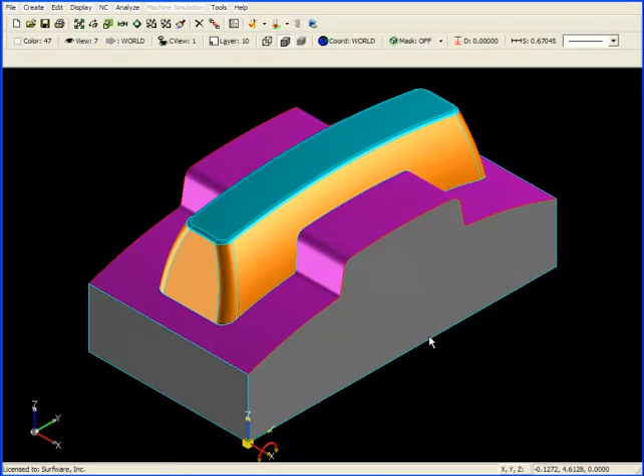In this video, I'd like to talk about pencil cut. A pencil cut is the ability to drive a tool along the intersection of two surfaces. To get to pencil cut, we're going to go to NC, down to 3-axis, and move down to pencil cut. SURFCAM asks us to select the cut surfaces, and I'm going to choose visible.

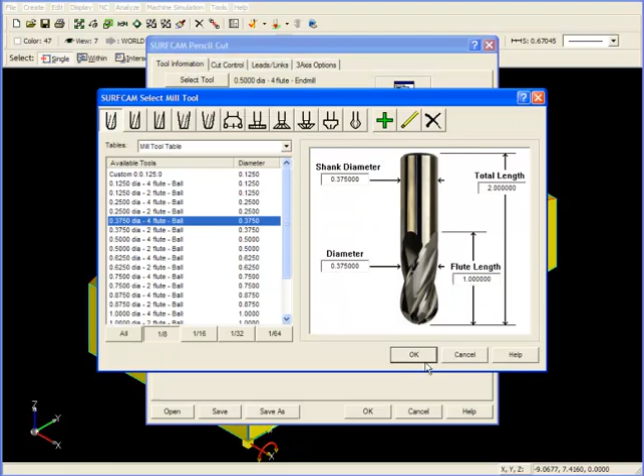I'm going to select a ball nose end mill, so I'll click on the ball nose icon and choose a .375 4-flute ball. Click OK, and we're asked for tool number, length offset, and diameter offset. Make sure these numbers are appropriate for your program. I'm going to go to cut control, and we're going to look first at step over. Step over is the distance between passes. I'm going to give it 20 thousandths.

You see here we have an XY stock to leave and a Z stock to leave. You can leave this at 0 if you want to cut to finish size, or add or remove stock by putting in positive or negative numbers. We can also put in extra stock to leave, which essentially increases the diameter of the tool that you're using. This makes it possible to use a smaller tool on a larger radius. Our angle ranges from 0 degrees to 90 degrees. I'm going to accept that for now.

The other thing we want to look at is down here at the bottom where it says limit offset passes. We're going to have 5 passes on either side of a centerline pass. All these passes work from the outside in, which means that you're going to remove material in the most efficient manner. I'm going to click OK, and we're going to see what we get.

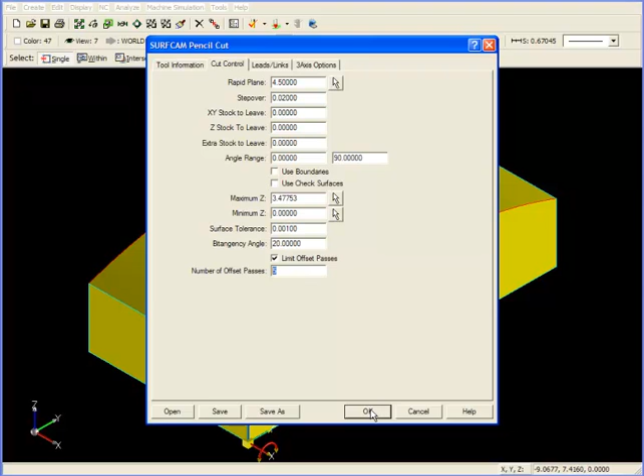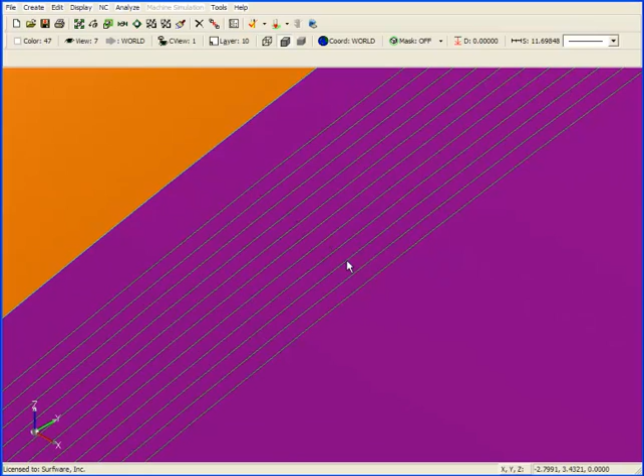Here's what our pencil cut looks like when completed. If you recall, we asked for 5 offset passes. And if we zoom in, we can count those 5 passes on either side of the center line. Here we have 1, 2, 3, 4, 5. Here's our center line pass. And then 1, 2, 3, 4, 5 on the other side.

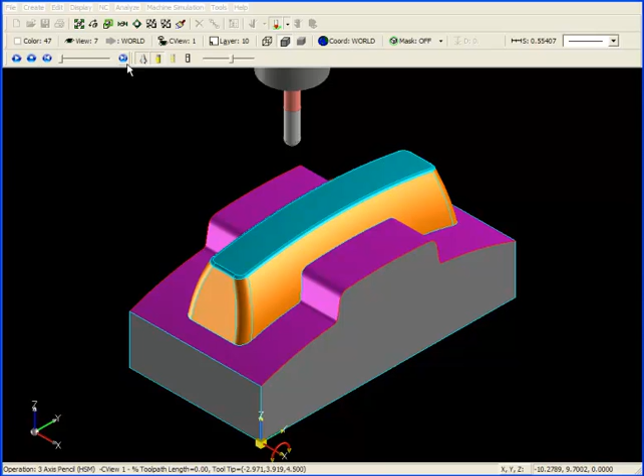Another thing to look at here is the high-speed machining moves as we enter and exit the material. This will provide you with a smoother blend into the part and speed up your machining process. If we want to see how the pencil cut works in real life, we can go up to Backplot, select our pencil cut, click OK. Then I'm going to adjust our slider bar here to increase the speed of the simulation, add a tool holder, and press play.

Here the pencil cut is coming in from the outside, going around the majority of the part. Now we're cutting one of the sides and the other side. You see all of these passes occur from one side of the center line or the other, all with high-speed moves.

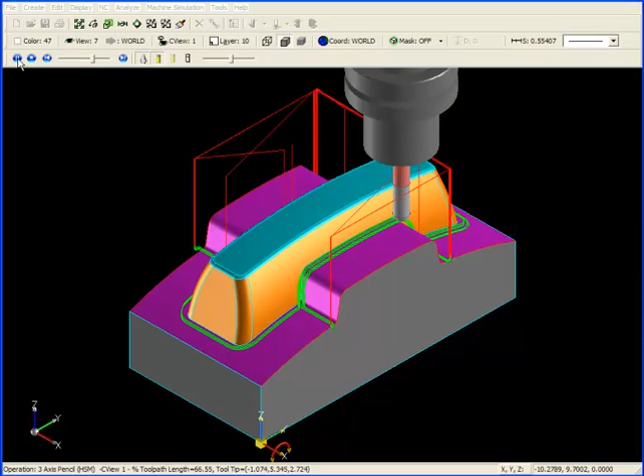I'd like to point out a couple of things in pencil cut by going to our Operations Manager and regenerating our toolpath. If we go to the Cut Control tab, I call your attention to Bitangency Angle. What this means is the shallowest angle between two surfaces in which you'll be able to make a pencil cut. If you increase this angle to 30 or 40 degrees, you'll limit the number of choices you have for making a pencil cut.

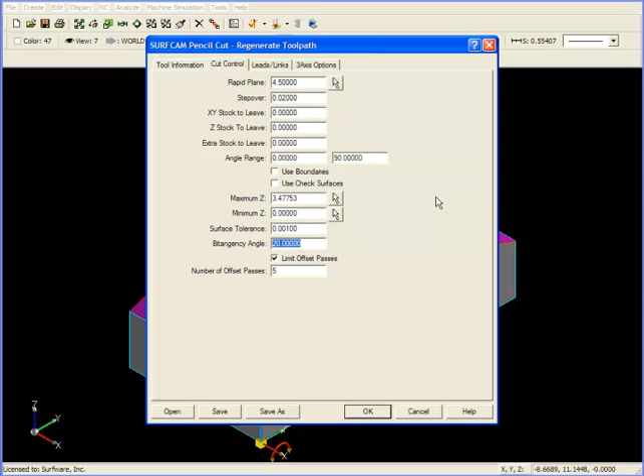Secondly, if we go to Leads and Links, we see our cutting direction is one way. This does not guarantee that you'll get a climb cut. If you make the passes and see that it's not climb cutting, what you can do is click on the reverse direction button and it will reverse the direction of the one-way cut. So if you don't see what you want the first time, click reverse direction and try it again.

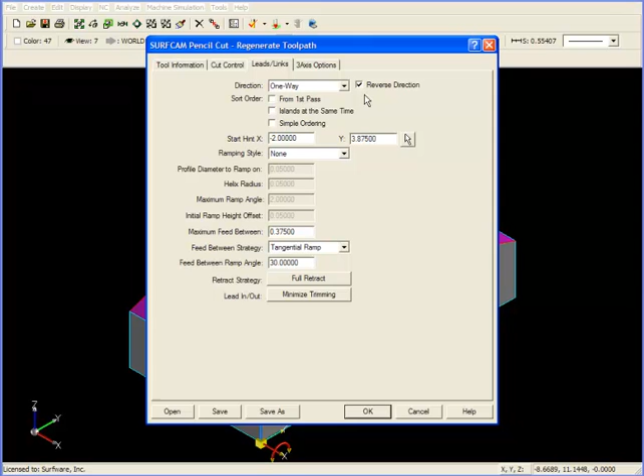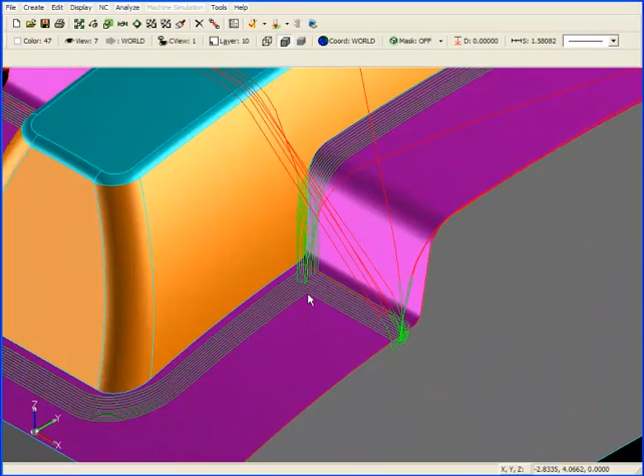The other thing I'm going to do is change our retract strategy from full retract to shortest route. I'll click OK, OK again, and we'll regenerate. Here's our pencil cut with the reverse direction and our shortest route ramping strategy. I want to show you one more thing. I'm going to zoom up in here and see our 5 passes on either side of the center line.

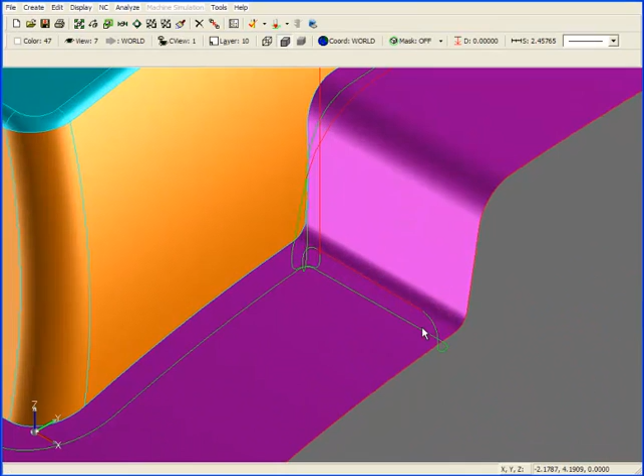I'm going to go up to Operations Manager and regenerate with original geometry. Go to Cut Control. I'm going to limit the number of offset passes down to 0. I'll click OK and we'll see what happens. As you can see, after changing the number of offset passes to 0, we have 0 offset passes on each side of the center line. What we have is just the center line, so we will get a single pass that's tangent to both surfaces all the way around the part.